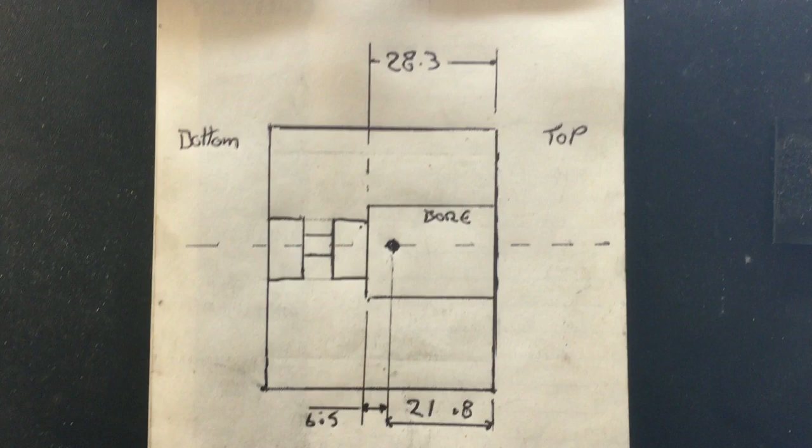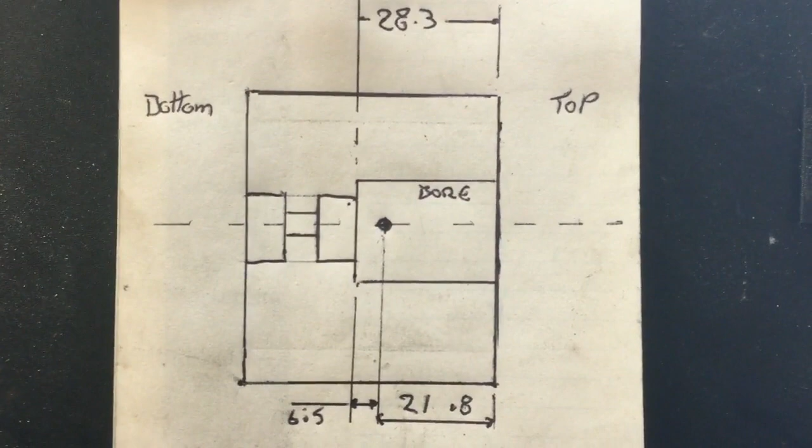My next step is going to be to drill and bore the two holes that are going to take the pistons. Now, my original bore in the top of the block to take the cam was 28.3 millimeters deep. I intend on using some 12 millimeter brass, so I must come up with a little bit of clearance: half the diameter of that, which would be 6 mil, give it half a mil of clearance, 6.5 mil.

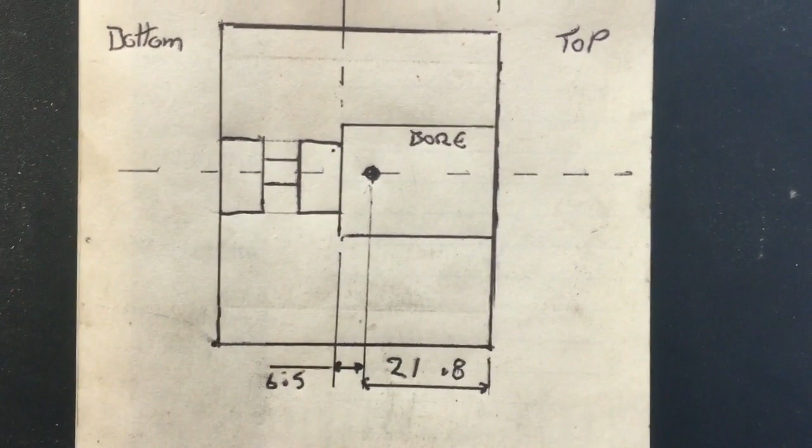So as you can see, if I drill a hole 21.8, which is 6.5 mil less than 28.3, from the top face, and then central about my 32 mil wide dovetails, so 16 mil on the center line of the dovetails, through into that central bore. I'll bore out some sort of nominal size 12 mil and then machine the pistons to suit the bores with a nice fit with an O-ring afterwards.

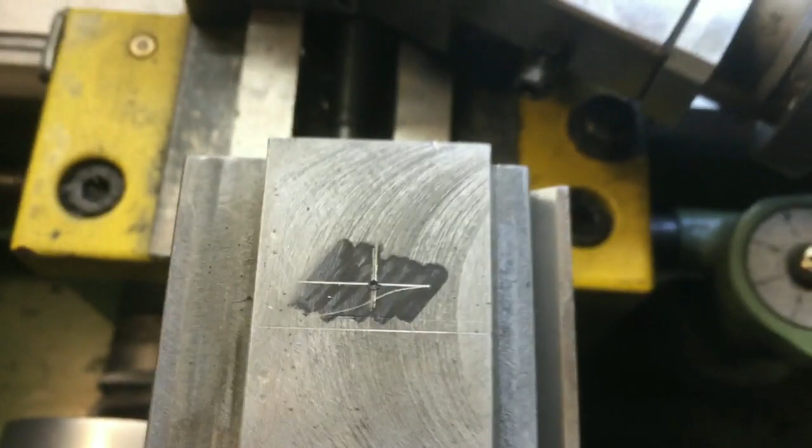So next step I've done is to center pop my block. I've marked it out. Oops, hang on, try not to drop it. Okay, so I've center punched a center pop in my block. As I said, 21.8 down from the top, and central about 16 mil in. Double checked it, come from both sides with the calipers to check the center pop, and it's on the center line of the block. So to locate the center pop, I use my magnifying glass.

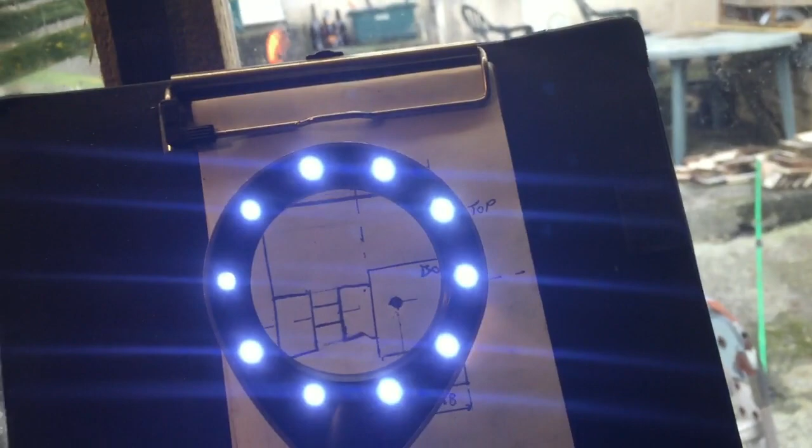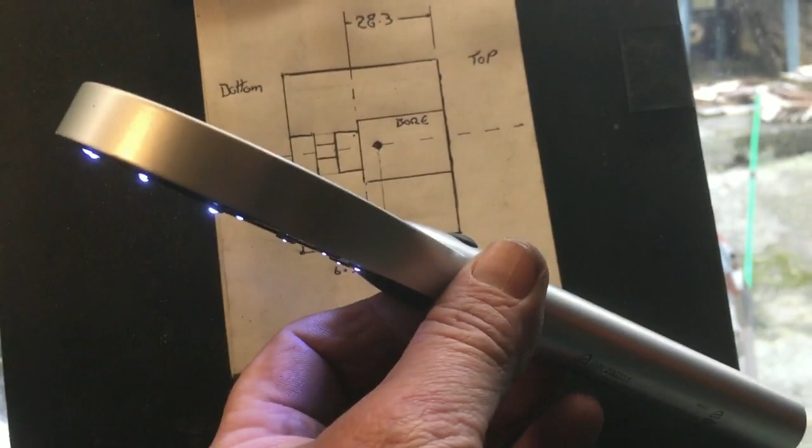I got a magnifying glass here that's got LEDs on it. Made of steel of some description, quite heavy, weighs about a pound. Had it quite some time, used it lots, never put any spare batteries in it. £7 in Lidl's. Can't fault it. Every now and again something good comes up in Lidl's. But yeah, I've used it quite a lot just for picking up fine lines and looking at fine details. So yeah, good old Lidl's.

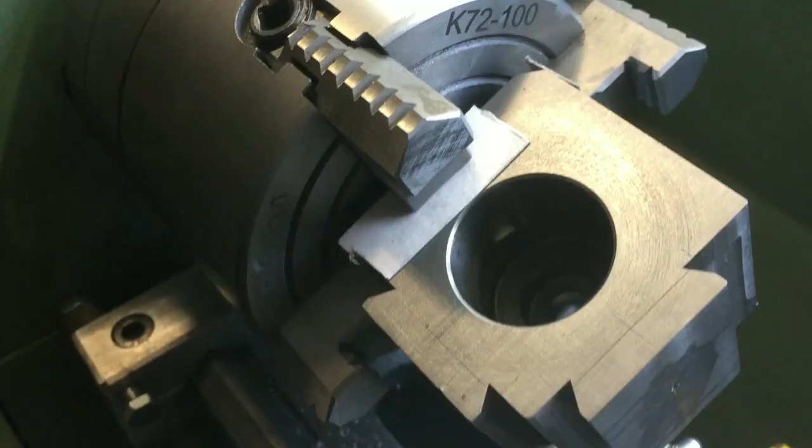So I've set my block up in the four-jaw. It's not clocked up yet. You can see it's a bit awkward to hold, but it's in there. And I put a piece of cardboard behind each one of the jaws, just to stop my jaws marking the block and digging in there. It's quite a new chuck, and the edges of the chuck jaws are quite sharp and will dig into this block.

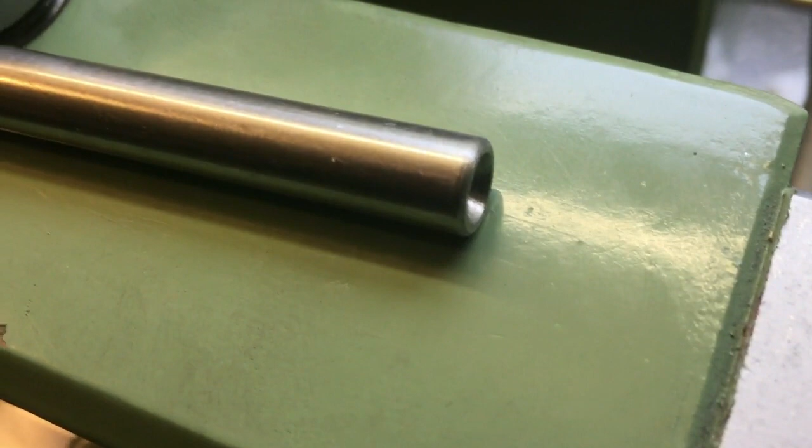I've set my clock up in the original quick change tool post, and using this pin, which is basically a piece of ground rod, it's a piece of O1 silver steel ground. One end has a center drilled hole in it, exactly on center. It was clocked up in the four-jaw to drill it, and the other end has a turned point on it, which again is exactly on center of the bar. So by placing the pointy end in the center popped hole in the block, and the other end in a live center in my tailstock. My tailstock's running really, really good.

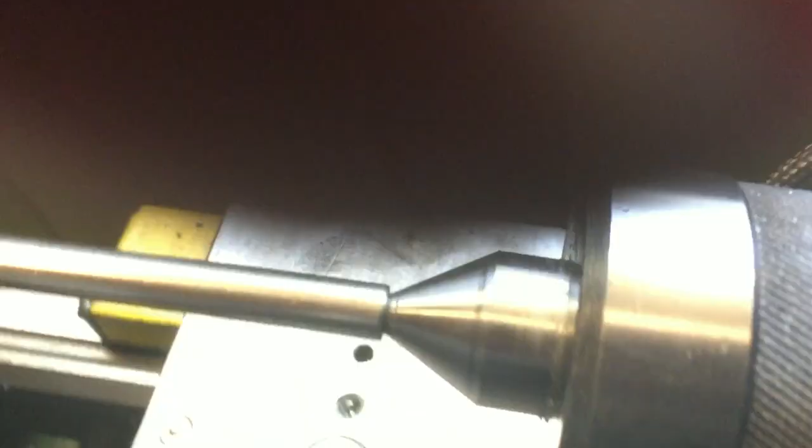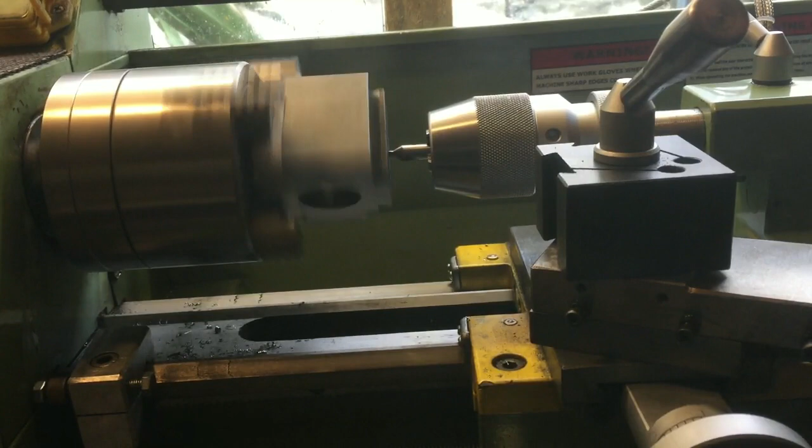So we're just going to center drill this hole. I'm only actually running at 204 RPM, which is very slow, way too slow for this center drill really. However, the amount of balance offset in this block, because it's a weirdly shaped block, and the hole is not about the center of the mass. If I spin it up any faster, I get really bad vibration on my lathe, and my whole bench starts to shake and rumble. So just to keep it in balance, I just run nice and slow. Way too slow for the center drill, but as long as I take it gently, not a problem.

So, change of plan. I have a 12 mil reamer. Plan is center drill, step it out to like 11.8, something like that, and then run a 12 mil reamer down the hole. Break the edge on the outside surface, probably do that with a little needle file, and that will be one bore done. Second bore will just be a complete repeat operation, setting it up in the four-jaw and away to go.

Well, that's the two piston holes done in the block. One on the front face, one on the top, both drilled and reamed to 12mm. Let's have a little look in the bore. I wonder if we can get in there and pick that up. And as you can see, in fact, a little bit of an error on this one. It's just scratching the bottom surface, but that's no problem.

And that one, yeah, probably 10 thou, 15 thou, something like that from the bottom edge. Yeah, a bit of a mystery that. Must have been a little bit out on my centre pop. But the piston itself doesn't actually intrude into the cylinder. That'll become apparent later on, so no worries with it fouling on that bottom face. Okay.

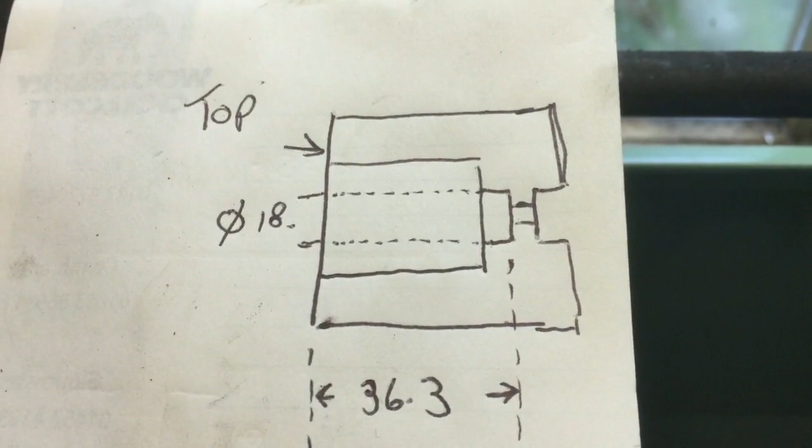The next job is going to be to make the clamp bolt that clamps the tool post onto the compound slide. Okay, so looking at the drawing or sketch that I've done earlier on, the depth of the 18mm bore in the top of the block is 36.3mm. So what I'm looking at is my clamp bolt is going to have an M10 thread up the middle. It's going to be 17.9 diameter, which will fit in the 18mm hole.

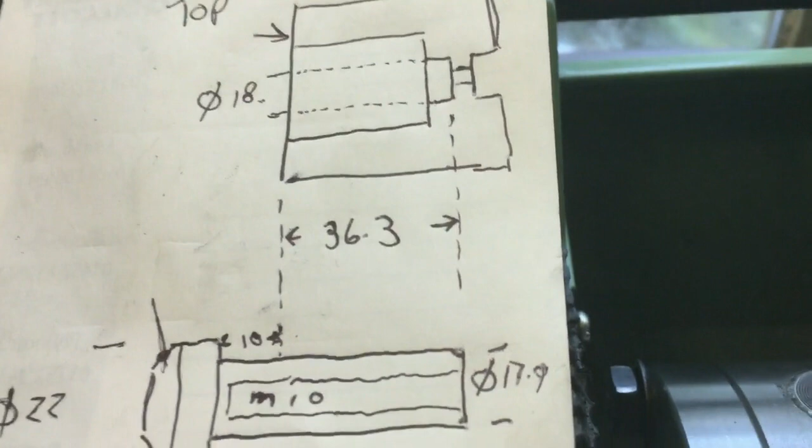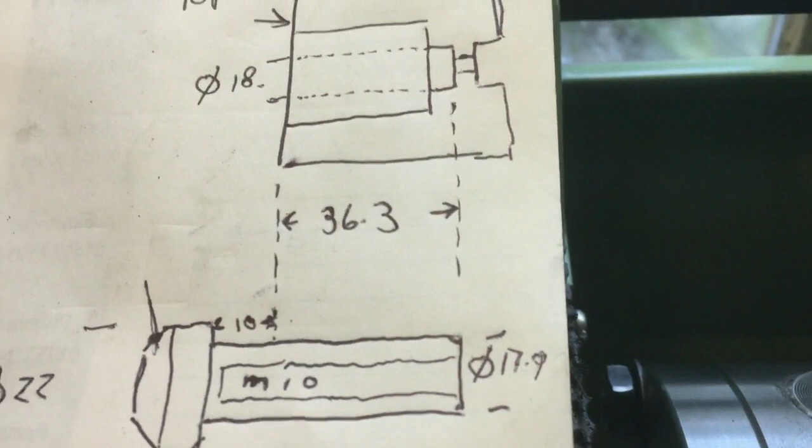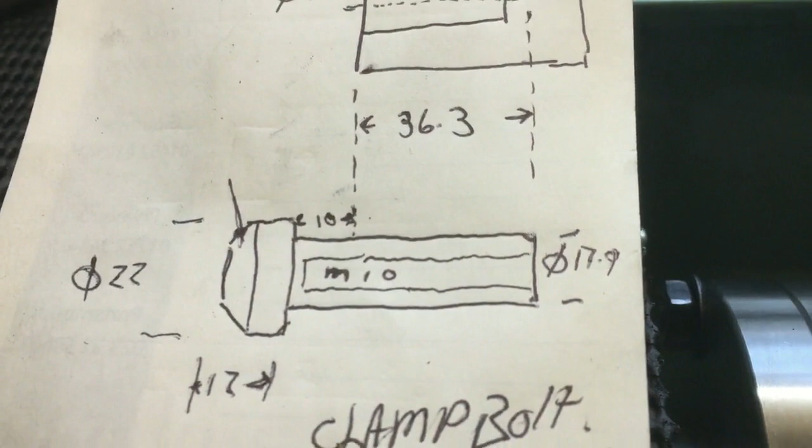I'm going to allow 10mm for the cam lock gap on the top of it. So that puts me up to 46.3. And the head's going to be approximately 12mm thick. So my total is going to be 58.3mm overall length. The maximum diameter there is 22. And I've got a piece of inch diameter bar, a piece of EN8, which is fairly tough, set up in the lathe, and I'm going to part it off.

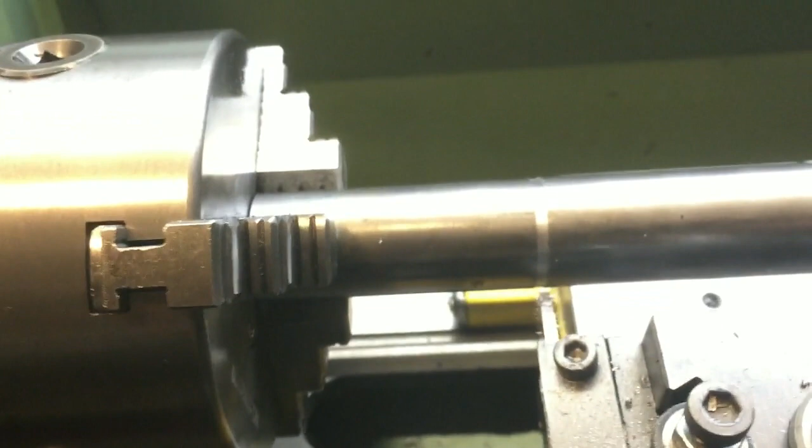Now, the bore through the spindle of my lathe won't take any more than 20mm. So I can't put a piece of bar in the chuck sticking out 60 odd mil, 62, something like that, and part it off in fresh air with a centre in it. I haven't got a bandsaw or anything like that. I do have a cutting disc and a grinder. I could have done it that way, but that's all a bit noisy. But why bother with that when you've got a lathe and a parting tool?

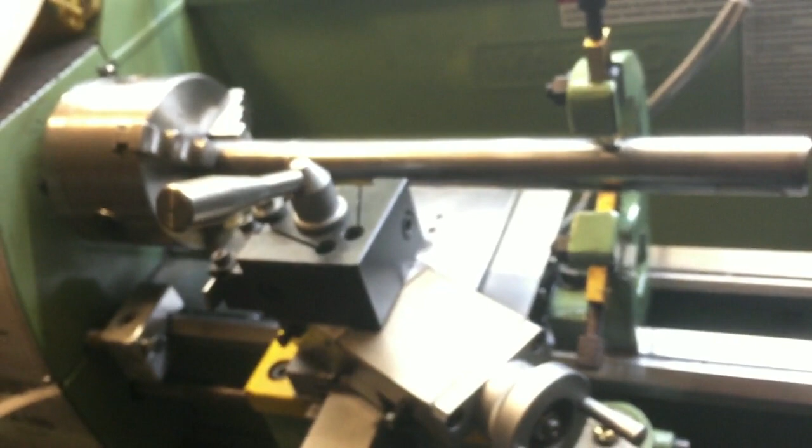So I thought the other alternative would be to set the bar up, run it in a fixed steady on the far side of the carriage, hold the bar, set the fixed steady up, part it off. Why not? Got a lathe, part it off. Less noisy, less hassle, no problems.

Obviously with this setup I'm not going to part it off completely, because that will leave the scrap piece of bar flailing about in mid-air and might have a crash, all sorts. So I'll probably part it off to within about, I don't know, I'll leave about an 8mm diameter, and I should be able to hacksaw that off in seconds.

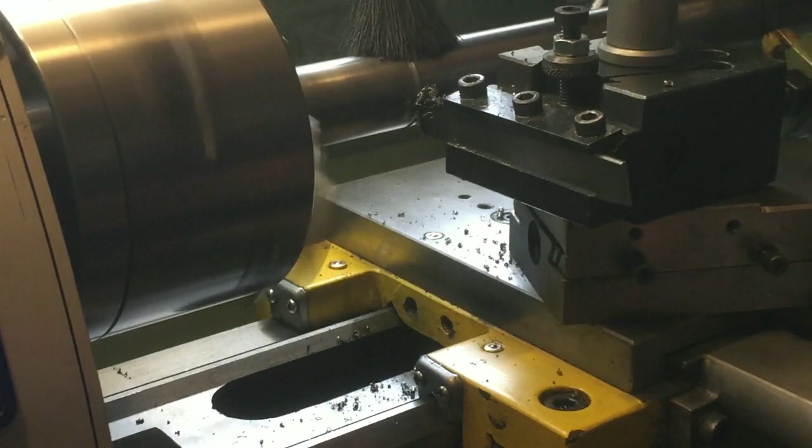Parting, everything sharp, everything lined up. Keep the pressure on, don't be afraid of it. This isn't the ideal setup. I can get a bit of chatter out of the fixed steady. Using a bit of cutting fluid. And it's coming off a treat. I'll give you a close up of that. Let's give you a close up.

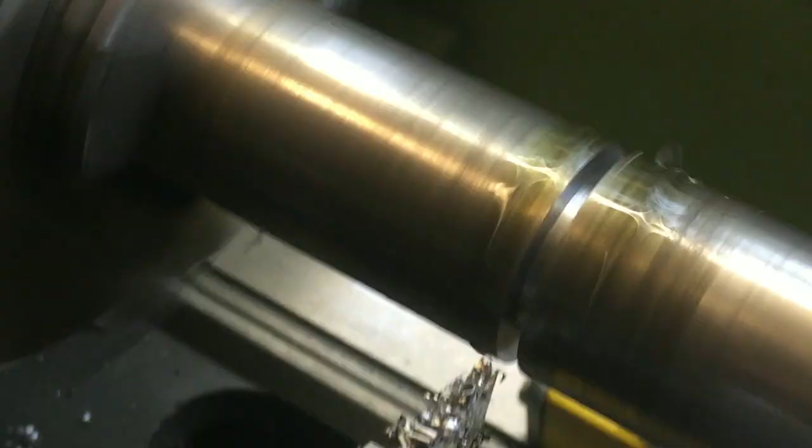Not sure how successful this is going to be. Pressure on. Don't break the nerve, just keep the pressure on it. As you can see, the WARCO lathe, inch bar, parting all set up correctly. Even though I'm running in a steady way out here, it's chewing it. And it's a piece of EN8. And it's not the softest stuff in the world. That shouldn't be a problem.

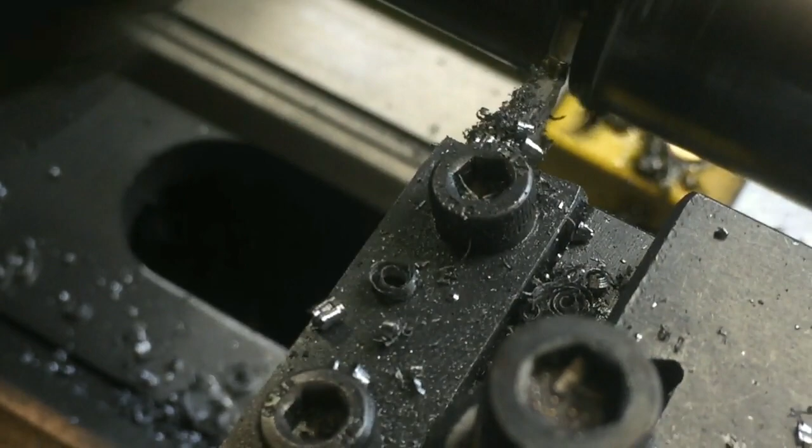Now, as I said, I'm not going to cut all the way. I've got one hand on the camera, one hand on the cross slide wheel. I haven't got a spare hand to put some gloop in there. Here we go. Going down to about 8 mil, something like that. Just going a bit further. I'm trying to watch the cut at the same time. That's about 6 mil. And that'll take me moments to hacksaw off.

But how long would it have taken me to hacksaw through an inch bar? Only a couple of minutes. But why have a dog and bark yourself?

While I'm in the mood for parting off, I've got a piece of, I think it's 1 3/4 bar here. That's going to be a bit of a challenge for the parting tool. And to make the cam, again it's a piece of EN8, I'm going to need a piece about 40 mil long. I'm certainly not going to hacksaw it off at 1 3/4. So I've set it up in a 3-jaw again, running nice flat end.

This end was wobbling about all over the place, so I've just tapped it in and clocked it up, just, you know, within a couple of thou. And I'm going to centre drill very carefully, centre drill the end of it, because there's a lot of weight hanging out there and it's only just holding in the 3-jaw chuck. I'm just tickling it with a centre drill in the end. Not doing anything untoward, not giving it any welly at all.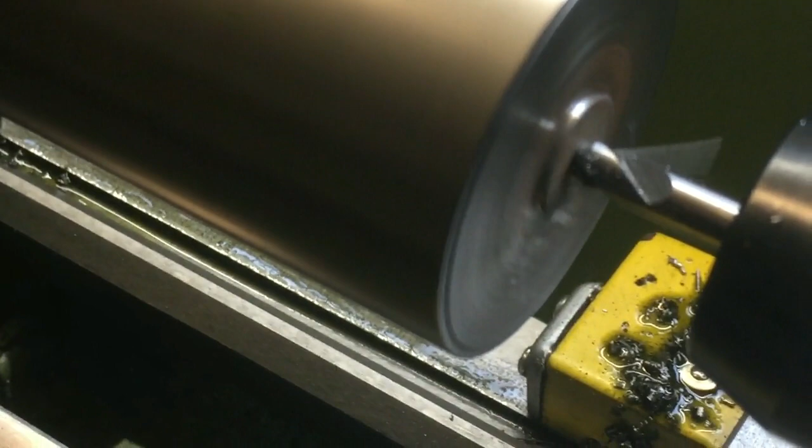There's a fella I follow on YouTube, great guy, great channel, Double Boost, John Mills, and he's got a saying which comes up quite a lot, which is that a centre drill has got one ambition in life. And he's spot on, and that ambition in life is that it wants to snap off in the hole. You can't give them enough respect, centre drills. They do a great job. But when they snap off in the hole, you get all sorts of grief. So when centre drilling, keep backing off, keep cleaning it up, and away you go.